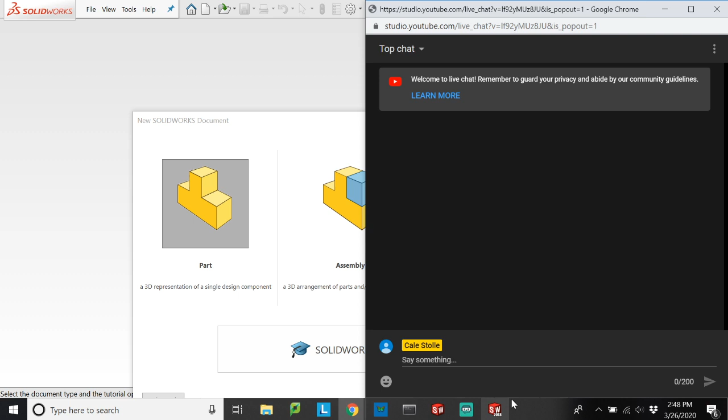For now, I'm just going to jump back into SolidWorks. We're going to start by creating a part. I'm going to try to shrink this so I can see whether or not somebody's interacting with the chat. Oh look, I have it! Okay, I'll be able to see if somebody posts something here now. Nice. So feel free to make comments as you like.

So when you start a new part, it shows up like this. You've got your XYZ coordinates—that's already a big difference from AutoCAD. Here, everything we're going to be doing is 3D modeling. SolidWorks is specifically designed to make 3D parts. Even if you're taking sheet metal, which is inherently a 2D part, you can bend that into a 3D shape in SolidWorks. It's an incredibly powerful software.

Some people, if you've used SolidWorks before, will probably appreciate the fact that we're transitioning into SolidWorks now, because AutoCAD is a gigantic pain in the butt. And if you haven't used SolidWorks before, you're going to find out that AutoCAD is a gigantic pain in the butt. Even if you liked AutoCAD, which I have some fondness for, even then AutoCAD's a little bit outdated. But the principles present in AutoCAD perpetuate here into what now is SolidWorks.

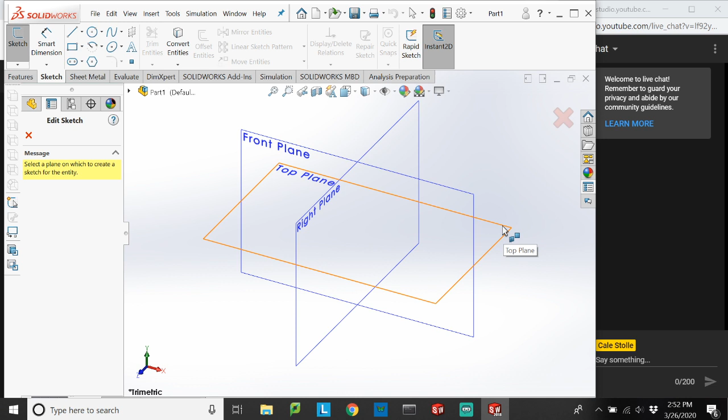Hit escape. The first thing that you do in any SolidWorks part is you go into Sketch and click Sketch. Now SolidWorks is going to ask you, hey, which plane do you want to draw on? I like drawing the top plane, just thinking I'm drawing top down. This right here is the origin again.

So if I click on this, this, and this, they are the same. It's usually a good idea to start drawing from the origin in a drawing. It tells SolidWorks, hey, the XYZ coordinates of this part in space should be located near the origin. When you do copy pasting, it makes that kind of process easier. It also allows you to fully define and dimension your drawings.

In AutoCAD, what we would do is click a line, start drawing, maybe start at 0, 0. We'd go over here and say I want this to be 15 meters long, and I want this to be 10 meters tall, or some dimension. What we're going to do in SolidWorks, instead of focusing on the dimensions, I'm just going to start drawing stuff.

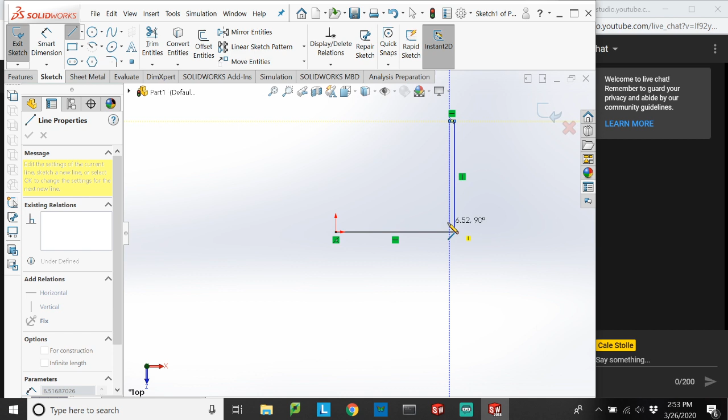So let's say I'm going to make an angled bracket for mounting... oh, I don't know. Maybe I'm making an angled bracket for mounting a shelf on the wall. And this is the best I can do because I'm absolutely novice at this, apparently.

By the way, having a mouse with AutoCAD was really helpful. Having a mouse with SolidWorks was also really helpful. If you scroll your mouse wheel, it zooms in and out. If you click on your mouse wheel and move, it actually does a 3D rotate.

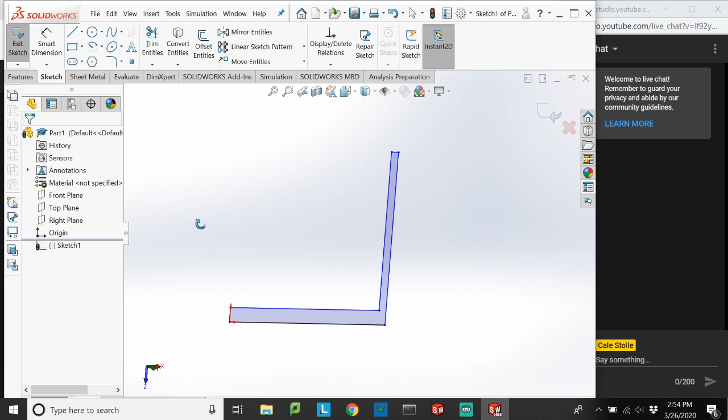So the pan feature in AutoCAD, which is one of my favorite features, has now been replaced by a 3D rotate. Not a huge fan of 3D rotate, because it always messes up your origins, and then it's like, okay, how do I draw on this?

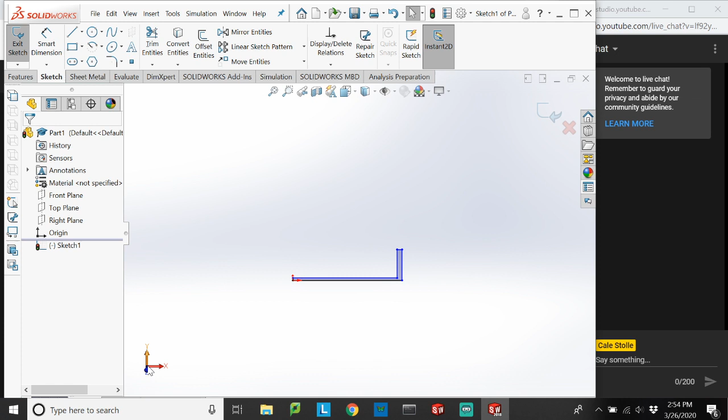Well, now I've been drawing on the XZ axis. If I click on the Y axis, it'll zoom right back into this. I can click on the Y axis again and it'll flip it around, so I'm looking at the back side of it. But if you ever click the center wheel of your mouse and get lost, just go over here and click on your Y axis.

There's also some controls for viewports, which I am not as familiar with, so I'm not going to pretend I know them. But let's say you've got a drawing now, all I did was I drew lines. The important thing we're looking at next is that each of these lines has an individual property.

So if I click on this line, it isn't just 2 points. In AutoCAD, every line also has a property, has a line width, has a layer type. In SolidWorks, clicking on a line usually brings up these line properties, which are a lot different.

Every line has a relation. Now what the relation means is, okay, here a line is coded by it consisting of this point and this point, with properties associated with it. So here it's got a vertical relation.

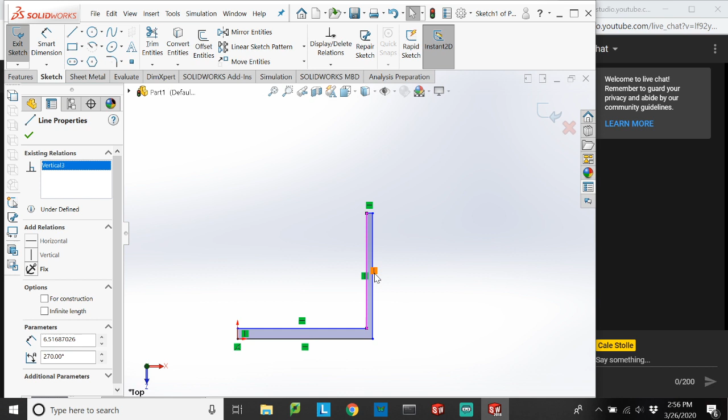What that means is that this line, no matter what I do to it, will always be up and down. It will always travel in the Z direction. It's not ever going to be slightly horizontal, nothing.

I can make it for construction, which means it's not a real line. I can make it infinite length. Here's the current line length, here's the current angle — it starts up here and goes down, so it's going at 270 degrees. You can pop up additional parameters, which show the X and Y endpoints of this line, the change in X, the change in Y.

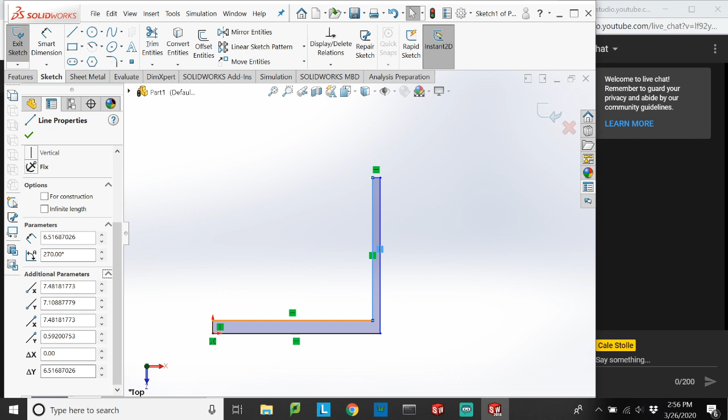You can get all of these properties, and this is properties that a line in AutoCAD would have. But the key difference here is this vertical relation. In AutoCAD, we didn't have a way to force this line to be vertical. So what I'm doing now is just clicking on this line and dragging it — as I drag, this line will always be vertical.

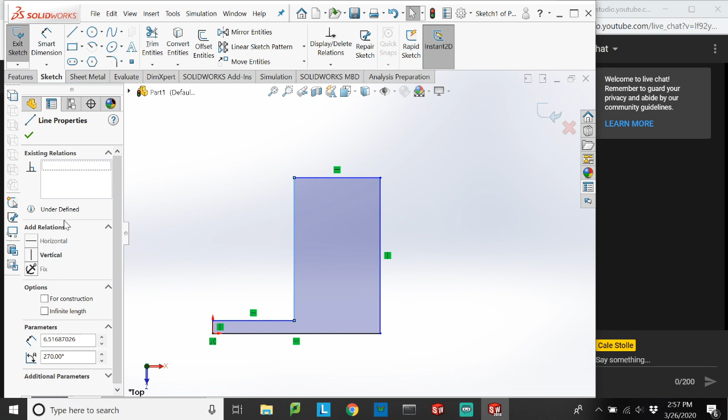If I were to click on this line, go into the relationship, and hit delete, removing that relationship, now this line doesn't always have to be vertical. I can grab a point and move it around, and now this line isn't vertical anymore. If I force it to be vertical again, then even if I move this point, it will force that line to continue to be vertical.

Same thing goes with this line down here. This line has a horizontal constraint.

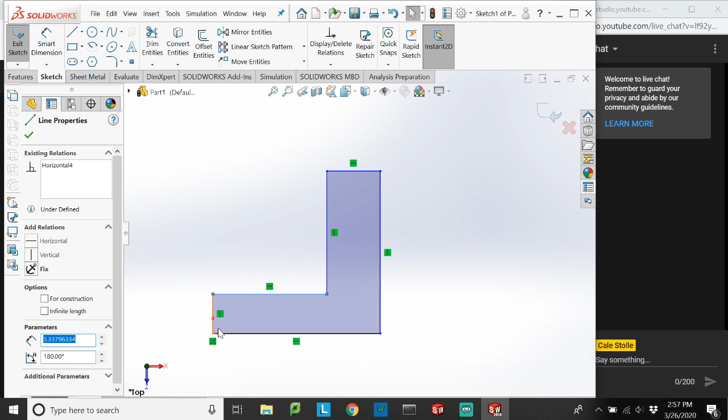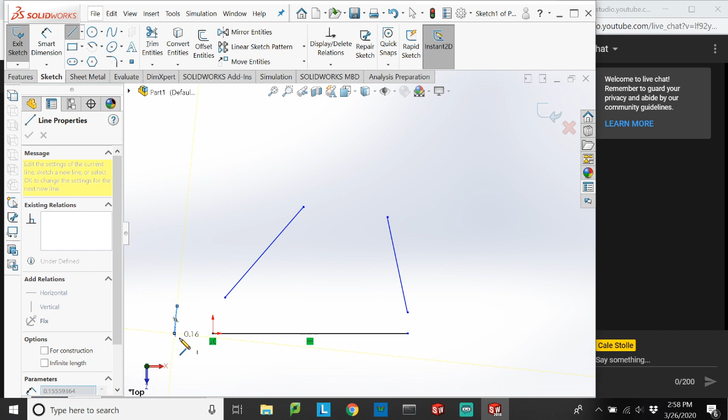Because I drew all of these lines so that they were in a row, every one of these endpoints are connecting. So if I just quickly grab, drag, delete everything, start over again, and draw lines where I say, here's one line, here's another line, here's another line, and here's another line. Now these lines all together really mean nothing, but with relations I can force this to become a rectangle or even a square. So this is just kind of an exercise in adding relations to something.

Normally what you would do to draw a square is you just go up here and you draw a corner rectangle, draw a square. Or you could even do it with lines if you don't feel as comfortable using an easy tool. But with having 4 lines right here, I can force this to be a square.

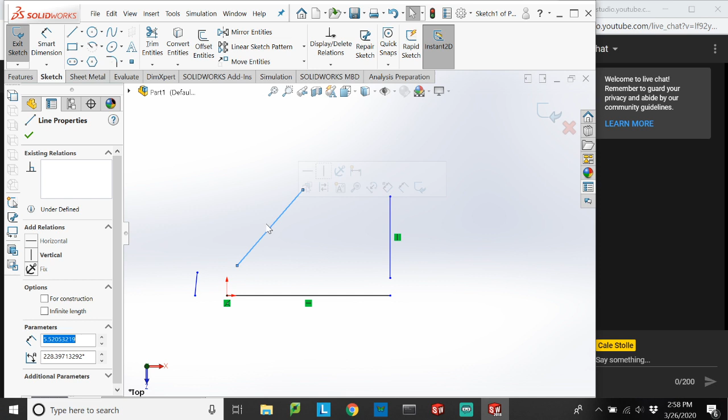And what I'm going to do is I'm just going to add relations. For this one, I want this line to be vertical. For this one, I want this line to be horizontal. For this one, I want this line to be vertical. And for this line, well, it's already horizontal, so there's no issues there.

Now I've got 4 lines that are all nice. I'm going to click on the points. Every point has existing relationships too. And if I click on 2 different points, you'll notice neither of these points have any relationships.

You can fix them, but I would never advise hitting the fix button. Fix button causes a lot of issues. It's basically like your sketch thinks that you cannot do anything to move that line. It can really mess with you. Don't hit fix, fix is a bad method. You only use it if you absolutely have to use it, and you have to be a pretty advanced SolidWorks user to know when you need to use it. For most of you, if you've never used SolidWorks before, please do not hit the fix button. It hurts you, and it makes it so hard to do any kind of troubleshooting if something goes wrong with your SolidWorks drawing.

So what I'm going to do now is click on the drop-down arrow on Display/Delete Relations. This is in the Sketch tab, and I'm going to hit Add Relation. The first thing it's going to ask me over here in the Add Relations box is to select an entity. When I hover my cursor over this point, the point turns orange. I'm going to go ahead and click the point, and you'll see it shows up as a point. So I clicked one point. I'm going to click this point, and now this one also shows up as a point.

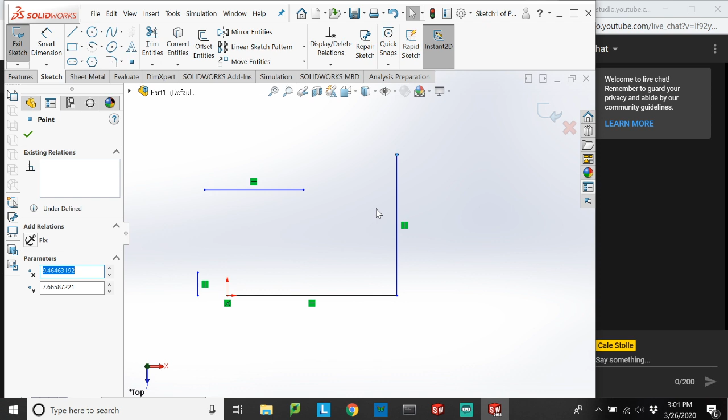What I'm going to do is click the merge button. What a merge button does is it turns 2 entities into one. It's going to take these 2 points and converge them so that now they're only 1 point. See, and now it moves the line down so that those 2 points are together. I'm going to hit yes, drop out of this. Now whatever I do to grab this, drag this, whatever I do, I cannot break those points apart because I have established that relationship where this line ends where this line ends. Both of these lines end in the same location.

So what I'll just do now is continue to add relations between this point and this point. Now you have 2 points. I will merge them, hit yes, add relation, this point and this point. I've got 3 points here. I still have this one selected. I just clicked on it again and it went away. I click on this one again and it'll go away. If that's the case, I would just hit escape a lot if you have multiple things selected.

Otherwise SolidWorks will complain because you're trying to constrain too many things together. So you got to make sure that before you hit the OK button or before you even hit merge, check to make sure your selected entities are correct. Now I've got these 2, I want to merge them. Brings that line up, yay!

Now I'm going to do the last one. Add relation, pick this point, pick this point. I've got 3 points in there again. I'll hit escape a lot, try again. Add relation, this point, this point.

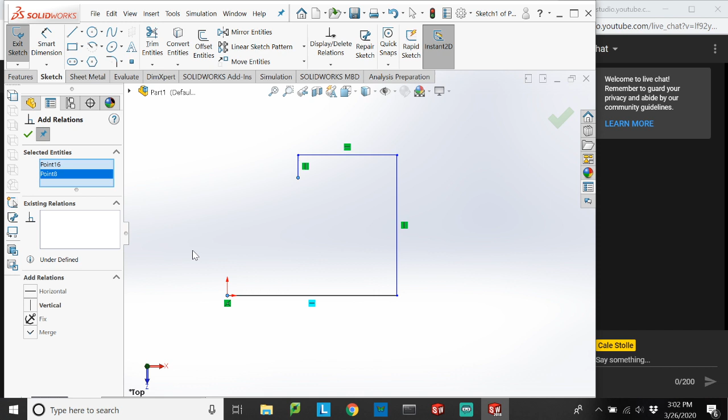Merge. Yes. Now this is great. How big is this rectangle?

Well, if I pick this point and stretch it, I can move this wherever I want. This point right here is on the origin, so I won't be able to move that. And I can't move this line, and I can't actually move this line. Clicking on that line and dragging it doesn't do anything. Clicking on this line and dragging it will cause it to extend upward. Clicking on this line and extending it will cause it to go this way.

Well, this isn't a square. How do I ensure that this is a square? What we're going to do is add another relation.

So far we've just been picking points and adding relations to them. Now I'm actually going to pick lines. I've got this line selected. I can deselect it, now I've got no line selected. I'll pick this line, and this line, and this line, and this line.

There's a lot of different options that appear for your lines when you want to add constraints. You can make them parallel. I don't want to make all four of these parallel because some are vertical and some are horizontal. That will cause SolidWorks to blow up. Hey, this line is going to be parallel to a perpendicular line. That's bad, I don't want to do that.

I can make them all vertical. I can make them all horizontal. Collinear means that all of the lines line up with each other. So if I'm drawing a line here and a line way over here and I want both of these lines to be in line with each other, you pick the collinear relationship, and then it'll be like it's one line that's just broken in the middle.

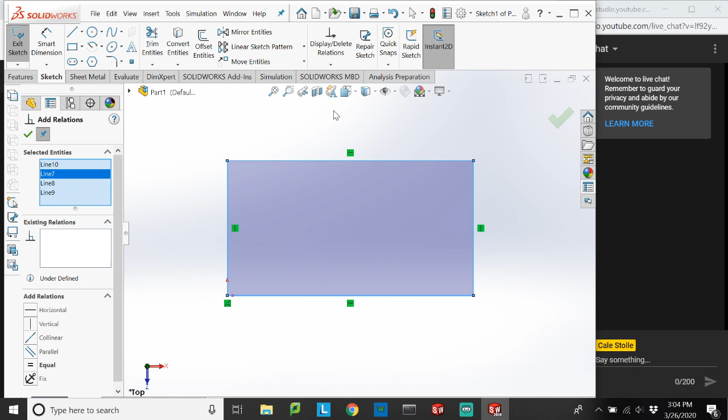But the one we're going to be focusing on is the one down here that says equal. If I click equal, that says the line length for each of these lines is going to be identical. So all four of those lines are equal. I'll go ahead and say yes to the relationship, and now I have a square.

If I grab this and drag it, you'll notice my square gets bigger the whole way. If I grab this line and drag it, it gets bigger or shrinks, but it always stays a square. We've constrained this shape to be entirely one square.

But I still haven't put any dimensions on this. The beauty of SolidWorks is that you can arrange and move your lines and change your dimensions and change your relationships after you draw something.

Whereas in AutoCAD, you have fixed locations of points. In SolidWorks, you don't anymore. You have fixed relationships that you're creating. So these fixed relationships, they're going to stay true. This will always be a square. I have forced this shape to be a square.

What I'll do to size the square is go up here in the Sketch tab and click on Smart Dimension. Smart Dimension is just like the Dimension tool in AutoCAD, except these dimensions are actually editable.

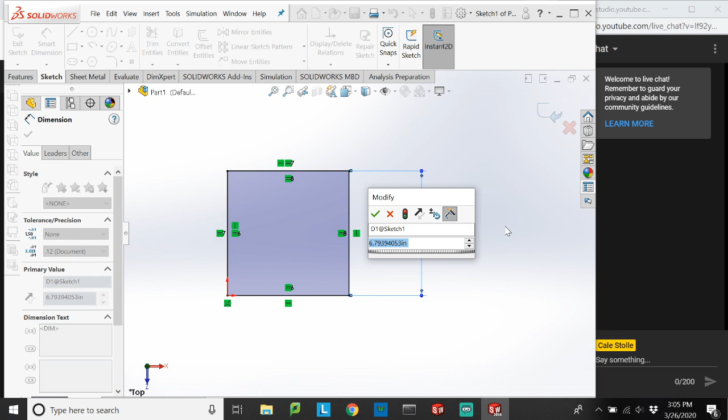So if I click on a line, it'll say this line is 6.79. Well, I want this to be 8. And as soon as I edit that, now this line is 8. As soon as this line is 8, this line is also 8, this line is also 8, and this line is also 8.

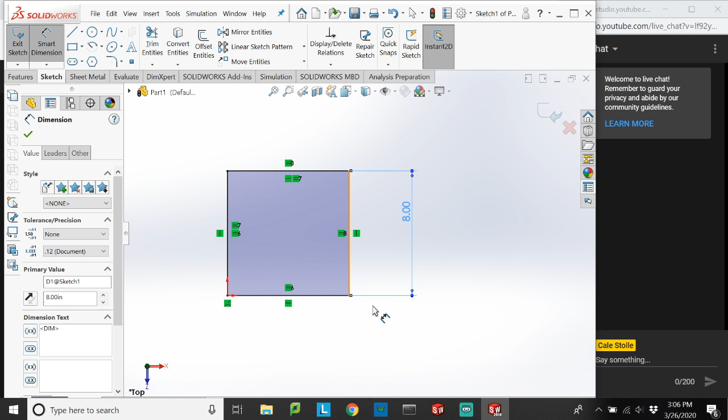You'll also notice that as I clicked on this and put this in, let me delete this out real quick, these two lines are blue. When I put on the Smart Dimension and force this to be 8 inches, these lines turn black. There's a big difference in SolidWorks between a blue line and a black line.

In a sketch, let me drop out of Smart Dimension so it's no longer going to function. In a sketch, a black line indicates that it is fully defined. All of the relations, all of the dimensions, the point locations are set, I can't add another dimension and change the way this looks. This is fully defined. There is only one way of making this shape with all of these relations, with this size. There's only one way.

And a fully defined, fully constrained drawing will turn black like this. It will be really nice, you know exactly what each dimension is. We talked earlier about making sure that your dimensions are very precise, very adequate for filling out an object. This is very critical at this point, especially in SolidWorks.

In AutoCAD, you can miss a dimension, and what that means is whoever's reading the drawing will have difficulty reading it. In SolidWorks, if you miss a dimension, it means you're going to be able to edit your drawing. You can click on this line, move it around. You can click on this point, move it around. You can edit your drawing. There's more than one way of creating what you have drawn. And that poses an issue, because then whoever goes to recreate what you're doing is unable to do so.

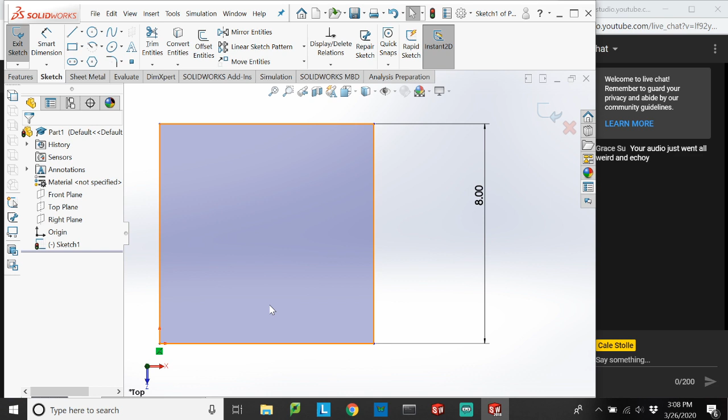Anyways, a well-defined drawing will have as few dimensions as possible. What I could do for this drawing is go back and click on the relationships, and I'm just going to delete them. I'm going to delete all of them. If I delete all of these, then I can click on this point and make this shape be whatever I want.

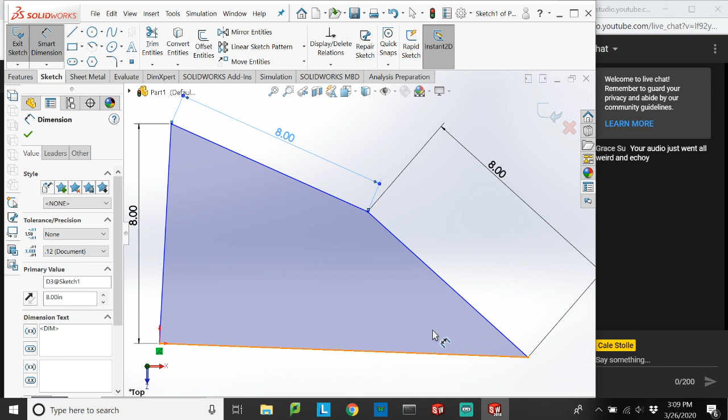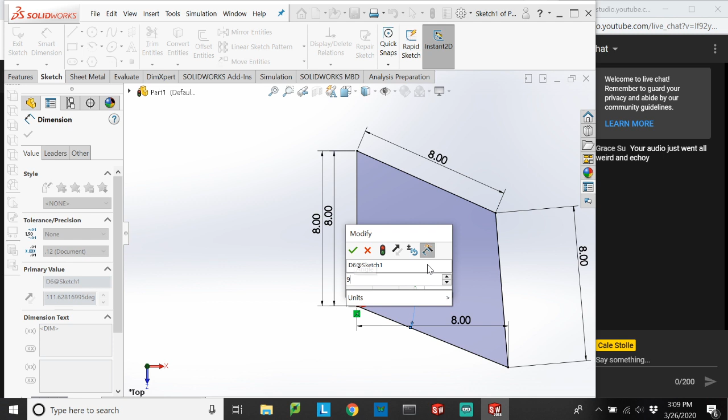This is still an 8-inch square. This no longer looks like a square. Now I can force this to be a square by drawing this very similar and saying, in order for this to be a square, this has to be 8, and this has to be 8, and this has to be 8, and this has to be 8. And then this has to be 8. Oh no, now it's a rhombus. And then I'm going to say the angle between these two lines is 90 degrees. So I can create a square using dimensions. That is entirely possible.

But now let's say I don't want an 8-inch square, I want a 12-inch square. In order for me to change this to a 12-inch square, well, I've already got 90 degrees. That one stays the same. I'm just going to delete you because you're unnecessary. Oh no, apparently that was necessary.

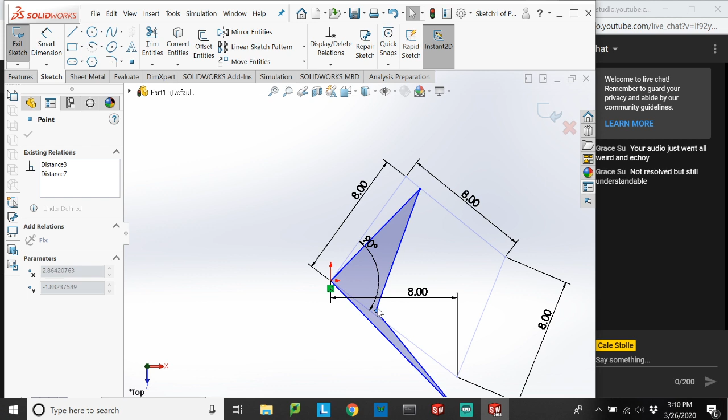Okay, oh my, it's still entirely blue. Ah, I can rotate. Ooh, it does something funky, look at that. This is not a well-constrained sketch. Yeah, this is why relations are just so much better than dimensions.

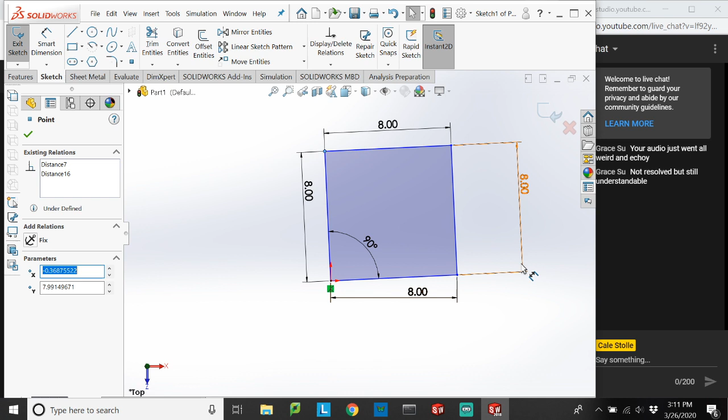You can tell I've been in quarantine for too long because this is not supposed to be this funny. Well, I'm sorry that it has not resolved. I will watch the video afterwards and try to fix the audio, whatever is causing the issue. It may just be that I need an update or something.

Okay, well this I think is a good place to stop anyways.

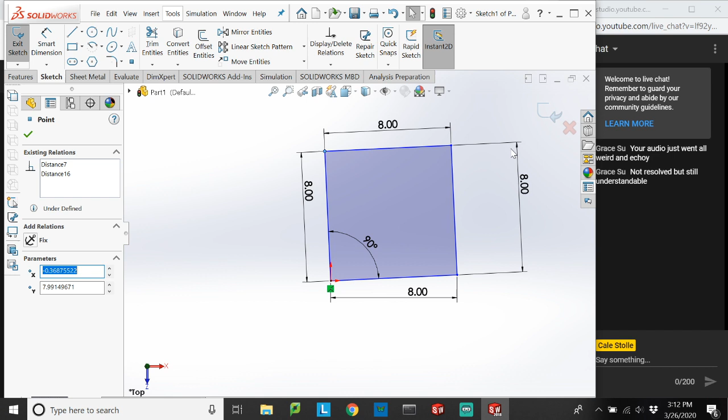We'll go ahead and next week we'll cover a little bit more into SolidWorks part making. You will have probably seen videos on this by that point, because I've just covered the very basics of SolidWorks sketching. At this point I hit exit sketch and we extrude this, turn it into a 3D shape and play around with it.